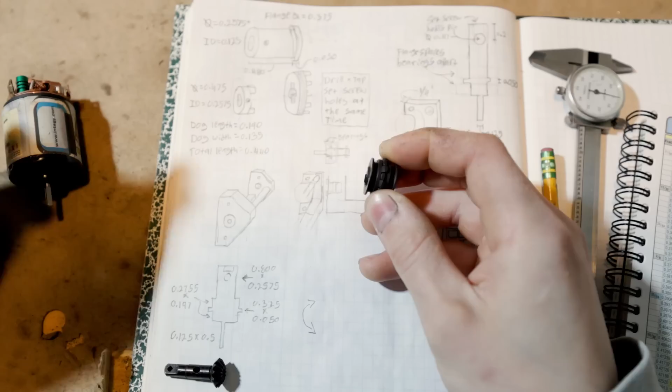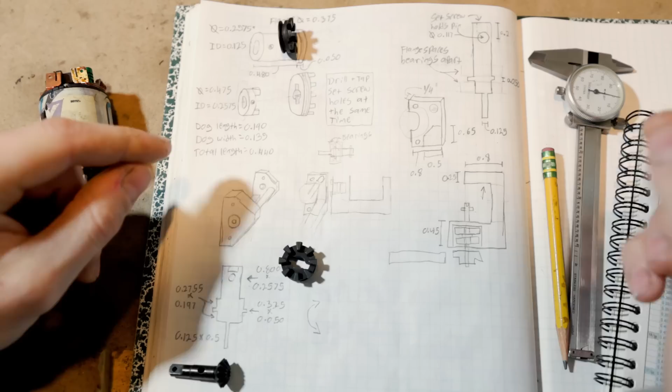So the first thing that needs to happen is one of these needs to get turned into a pinion for a motor. The way we're going to do that is by making a tube with a flange on it, and then the gear is going to slide onto that tube, stop at the flange, and then there's going to be a collar that then goes over top of that tube also, with two dogs that then align with the two slots here in the gear. I'm calling it a gear, it's not really a gear, you know what I mean.

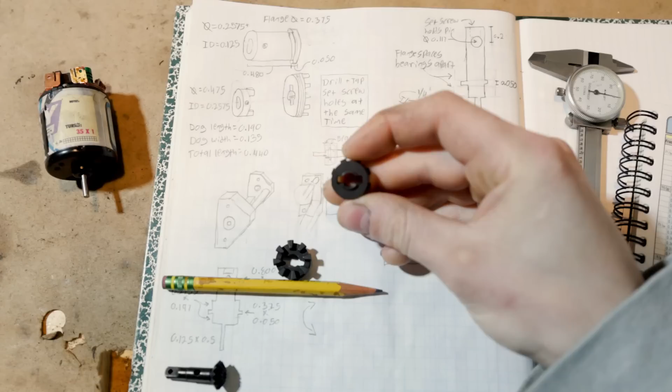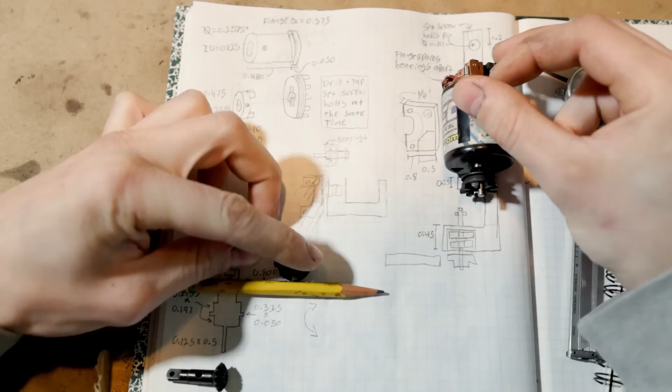That all is going to get held together with a set screw that is also going to hold that whole assembly onto a motor. Now that motor is then going to sit over here on top of this whole contraption, wherein there is a second one of these gears to engage and disengage with it on a shaft that sits through this big U-shaped block, essentially.

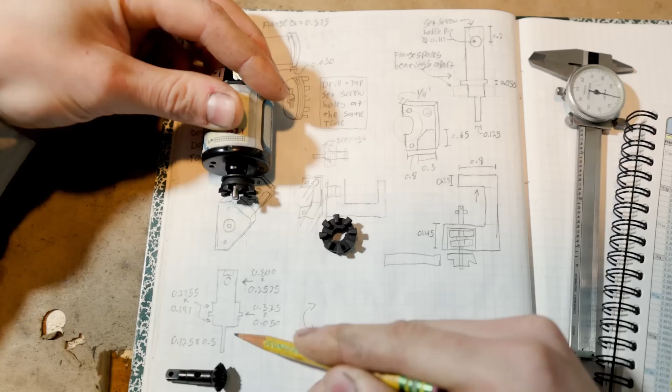So there's this big U-shaped block, there's going to be a shaft here with a couple bearings. This is a good representation of that shaft, so you've got one bearing that's going to sit right here, one bearing that's going to sit right there. Your motor pinion, or the outdrive pinion, is going to sit on this shaft. This pinhole is essentially the pinhole in this shaft.

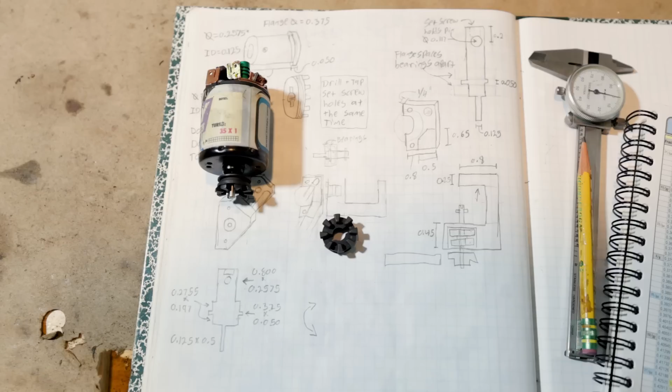Now if I could find the pin that I dropped, I would show you, but you guys are going to have to imagine it because I don't know where that went. So imagine there's a pin in that hole. That pin aligns with the slot in the gear, and thus the gear is able to slide over top of that pin while staying locked to the shaft. Does that make sense? I'm hoping that makes sense.

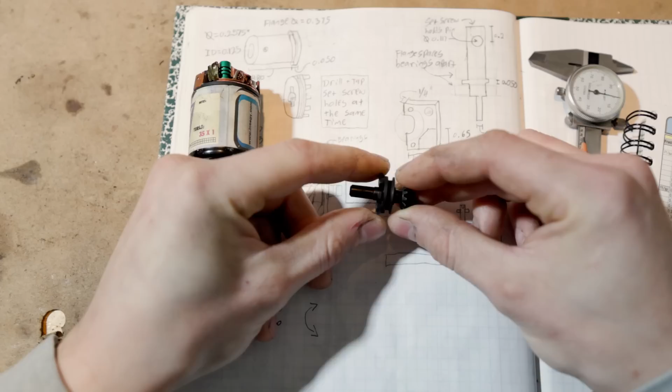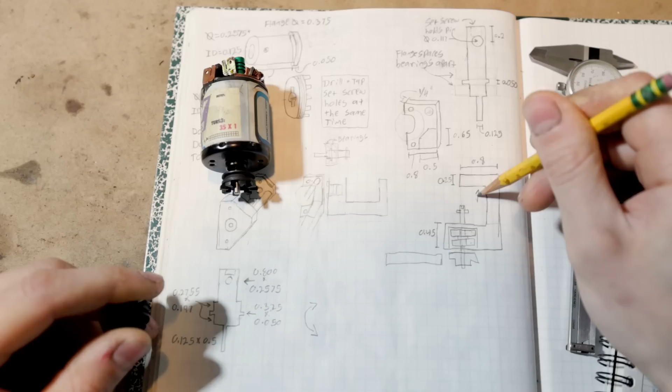So then that is what sits right here in this drawing and gets slid back and forth with some sort of fork that is going to ride on a shaft here. This diagram is looking at this big block of aluminum from this angle forward here. So there's going to be a fork that rides on a shaft right here that is going to fit into the groove right here on these gears and slide the one back and forth on the shaft over the pin like we were saying. This is just a cross section of the aluminum.

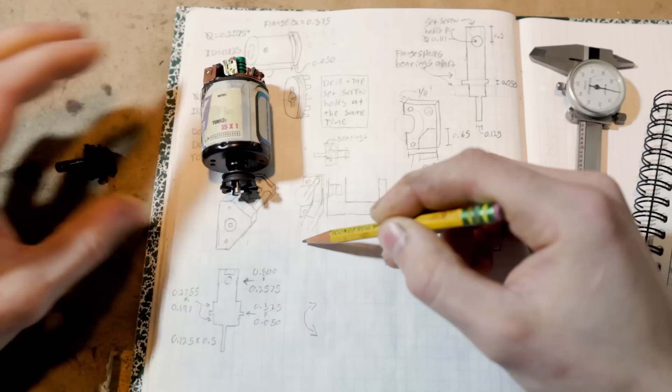It's going to be one big U-shaped block. It's going to look kind of something like this if you can imagine it. It's going to be kind of like a U shape on this side, but then it's going to have a big sticky outy bit, and then there's going to be another big block on the opposite side. Basically like this. This is another concept drawing I did. It's basically going to look like this, but a little bit different. Does that all make sense?

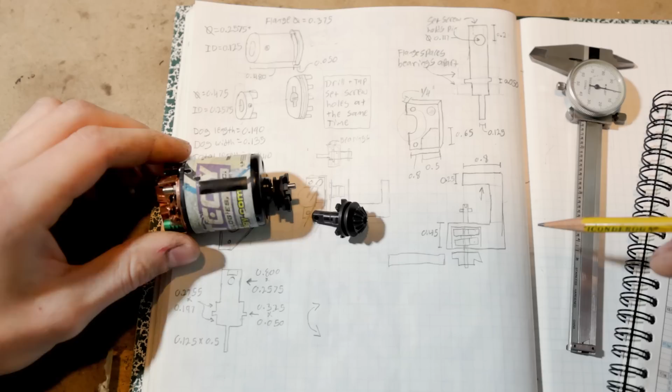I hope so. So anyway, all this is going to have to be done with the utmost precision because we're talking about tens of thousands of RPMs from our motor here. So I need to make sure that everything is spot on perfect in terms of dimensions. So the first thing I'm going to go make on Ramby, my turret lathe, is this flanged tube and this collar for turning one of these dogged gears into a pinion.

Quick progress update here, guys. I've got the flanged tube here fitting very nicely into our dogged gear. It's got a hole through it to accommodate the motor shaft. And then this part here is going to become the dogged collar that is going to slip over the back of it and engage with the two notches there that you see on the back of our dogged gear. So next for me is to cut said dogs on this piece and drill a hole through both parts to fasten it to the motor shaft.

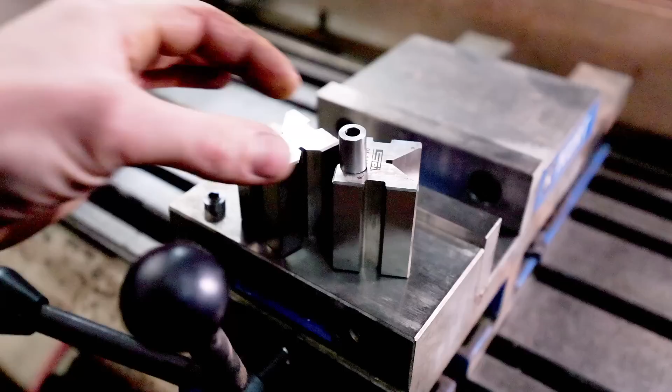So now, because I'm trying to machine such a tiny piece of metal that's round nonetheless, the problem becomes, how do I hold it? So the main way that it's going to be held, if I don't drop it, is going to be in these V-blocks here. So it's going to sit just like so. And that's all well and good, except when we go to clamp it. It starts to do that because it's so short and we need to take a fair amount off the top. So the way we combat this is by putting an offcut of the same diameter down at the bottom, like so. Now the bottom won't collapse in, and voila, just like that, we have a nice, firm clamping solution.

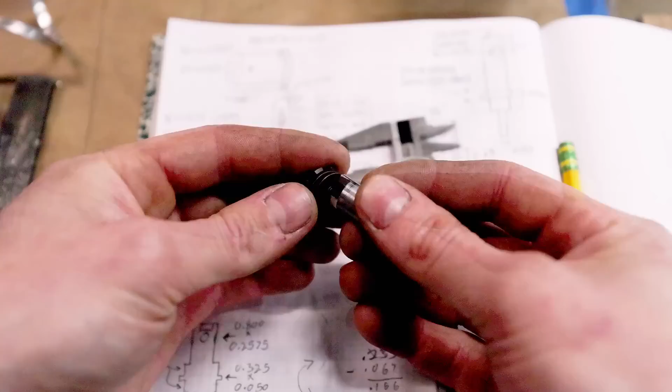Okay guys, it is test fit time. Here is the piece. Those are the two little dogs that we just machined. Let's see if it fits in our dogged gear here. Almost like a glove. Little love from the file, and everything is fitting together nice and tightly. It's even going to take a little tap to get it seated completely, which is perfect because I don't want this going anywhere when I'm drilling it.

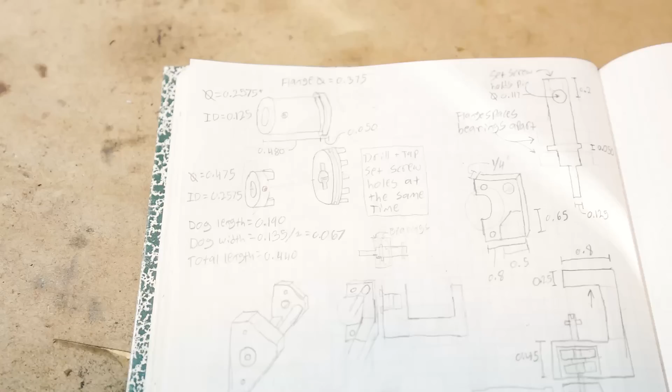Fast forward a little bit and we have our two first parts of our disconnect completed, and I've got them installed on a motor here. It's looking very nice. Everything fits together absolutely gorgeously, super tight fit, especially with the fit to the motor shaft. And speaking of, I want to give this a quick test to see if there's any excessive vibration. Alright, so we're just running on 6 volts here.

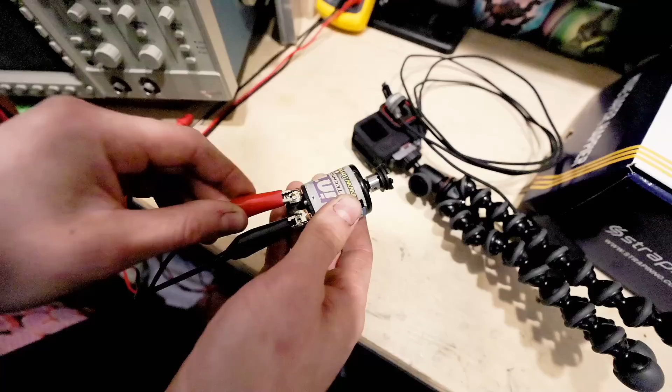Feels pretty darn good, actually. Feels pretty smooth. That's a really, really good sign. I can't see any wobbling or nonsense going on with this thing. I see a little bit of wobbling in the collar, but not of the actual dogged gear on the end there. And compared to it not on there, it feels just about the same, so that's awesome.

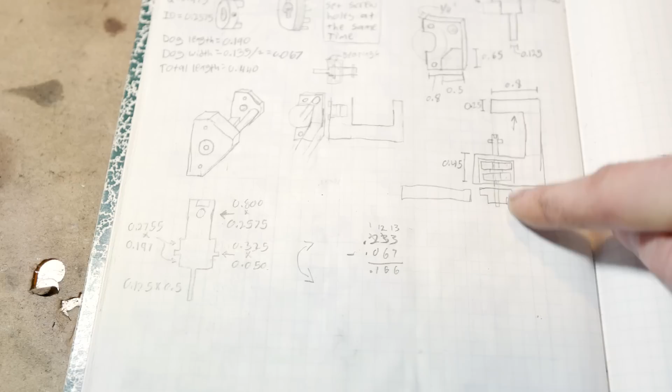The next part I need to make is this shaft here. It sits just here in our big aluminum block. It's got the pinion on one side, it's got our dogged gear on the other, has some bearings in the middle to support it. It's going to be a fairly difficult turning process because I don't want to remove this from the lathe once so that all my shoulders are perfectly concentric to each other.

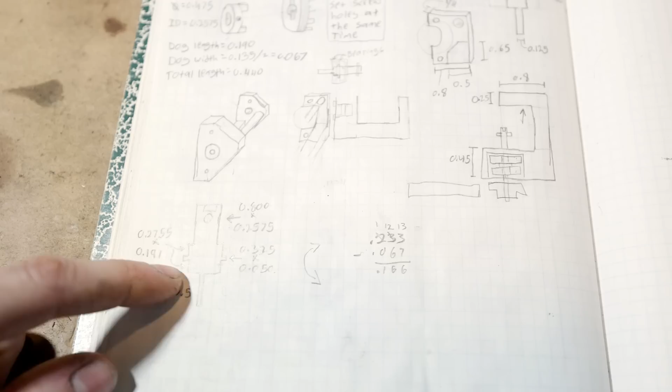So what I'll have to do is machine this out of a parent bar and then cut it out of that parent bar and check my measurements. So basically I'm not going to be able to do any test fitting of the bearings. I'm going to have to go entirely by measurement. That's going to be difficult, but let's see if we can do it.

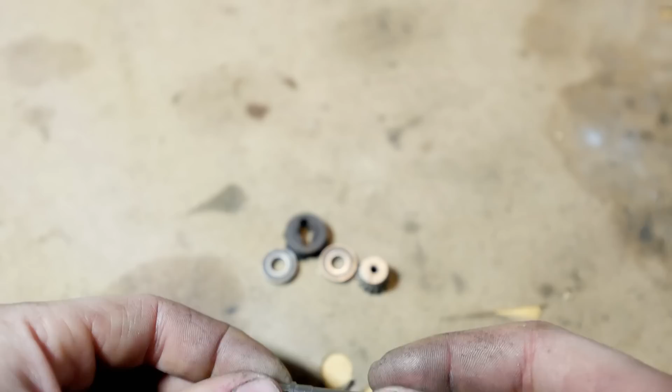Righty-ho, here is the shaft that I have made. It did not come off the lathe this nice looking. I took some Scotch-Brite to it and polished it up a little bit. Still need to learn a bit more about feeds and speeds on the lathe and how to get nice surface finishes. But I've got some bearings, I've got a pinion, I've got our dogged gear. Let's see how all of this stuff fits.

So pinion first. Does not fit. But that's a good thing. That means it's too big. We can always make things smaller. Next up is a bearing. Okay, this is nervous. This can either go great or horribly. That is also too tight. But again, that's not a bad thing necessarily.

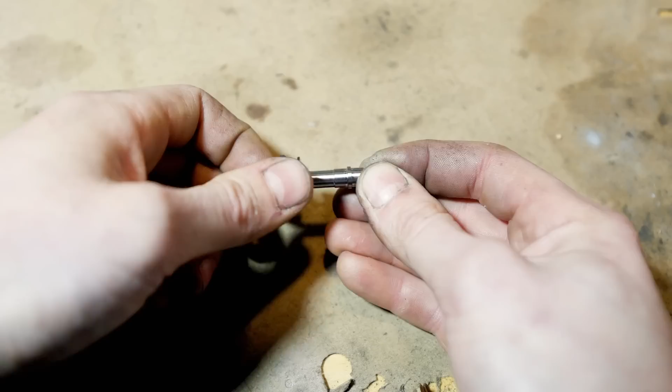Alright, so we got 1 out of 4, guys. That was kind of underwhelming. Our dogged gear fits on the shaft very nicely. It doesn't slide super smooth, but that's because the shaft is a little bit rough, so a little more polishing up and that should take care of it.

A little love with the file has our bearings sliding on super nicely. They are very tight in there, which is awesome. I've also got a flat now on the shaft for the pinion, which also fits very nicely now too. It's a tiny bit loose for my liking, but it's pretty good. I'm really happy with it.

And of course, this side for our dogged gear. You'll notice I haven't drilled the hole in the shaft just yet, and I'm going to wait to do that until probably close to the very end, because I'm not quite sure where our dogged gear is really going to end up on this shaft. I also left it long just for extra wiggle room. So with that, I need to go do some measuring and draw up some plans.

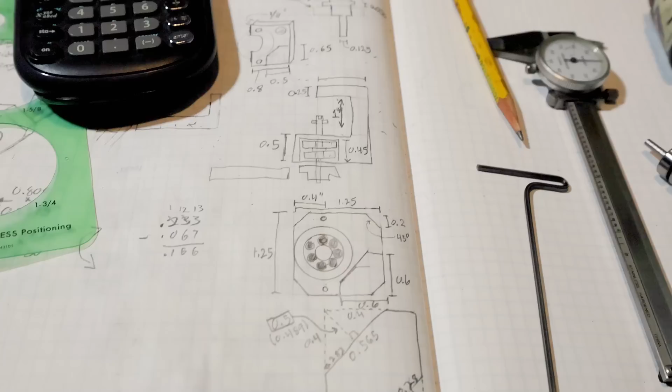And a little while later, I've got a pretty good idea of how this big aluminum block is going to work. I've got some good drawings, some good dimensions that I'm confident with. So with that, it's time for me to go out and start squaring up some stock.

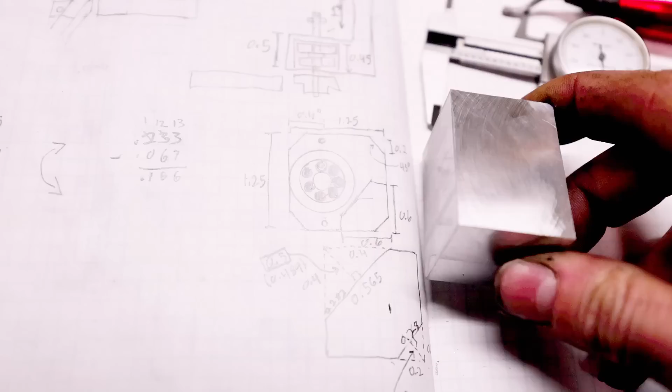I've got my stock all squared up nicely. As you can see, I already had a piece that was squared in this dimension perfectly, so I only had to machine 2 sides, which was nice. Next up, I'm going to machine these chamfers on the edges, which are these edges here, there, and corresponding on the other side.

Righty-ho, I've got my aluminum block nice and octagonalized, very nice and pretty there. Next up, I need to do some practice bores for our bearings, and to do that, I'm going to be using the canned cycles that are in the milling machine. Now, what are canned cycles? I'm saying canned as in like canned spinach. Canned cycles are essentially pre-programmed programs, or pre-written programs that you just input a couple variables and it writes the program for you so that you don't have to do all the work.

So I need to do a couple tests, not only to get our bore diameter correct, but also for me to just remember how to use the stupid things, because it's been a while and I don't want to crash anything.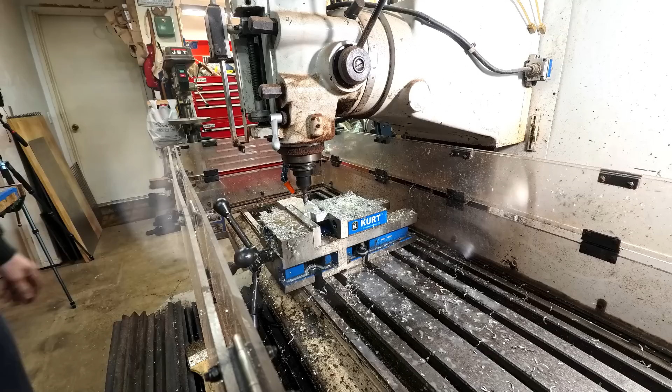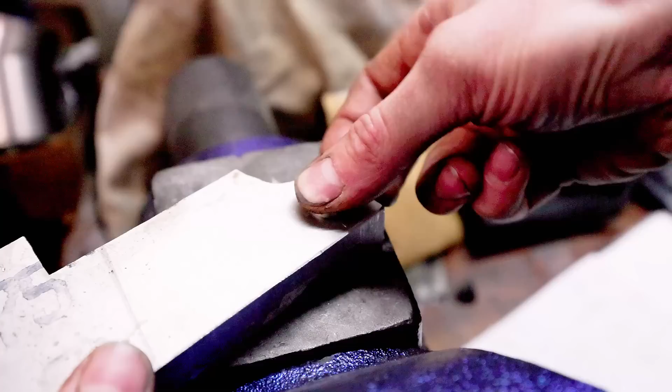Guys, we got ourselves a fit. Check this out. Oh yeah, simply gorgeous, darling. Man, that is just absolutely beautiful. Such a perfect fit. So with that, let's move on and put one of those holes in our octagonal block.

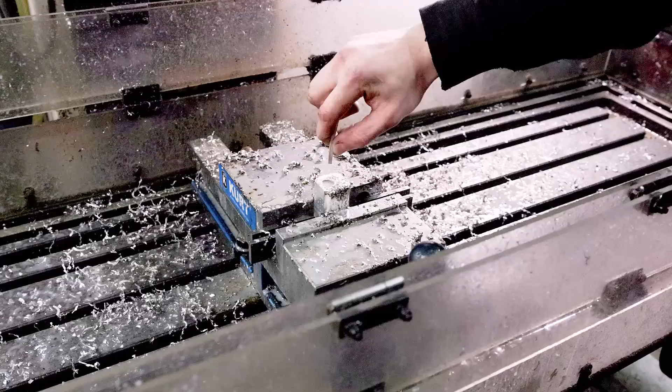Oh, I fucked that up. Wait, did I? Hang on, I don't know if I fucked this up or not. I have no idea, guys. Let me see. I cannot see in that hole, but something tells me that is too deep. Oh, no, actually, I think we got it. Holy crap, that is awesome sauce. Yep, we're good, guys. I don't want to push that in there because I can't get it out, but that is a freaking fit. Oh, yeah.

Woohoo! Next, what I need to do is drill a hole smaller than that all the way through the block. What we're doing right now is creating a shoulder for our bearings to sit on so they don't fall all the way through the hole, essentially. It'll make more sense once the whole thing is done and you can really see and understand what's going on. But we're making a shoulder by drilling all the way through, and creating clearance for the motor. The motor's got a little bump out by the shaft. It's to accommodate that as well.

And while I'm here, I'm also going to drill 2 mounting holes for this thing, because this is essentially the extended side of the motor. So this surface is what's going to get bolted to our motor plate. And I want to make sure that those holes line up with a standard motor configuration so that I can take this silly contraption out if I want to and bolt in a normal stock motor.

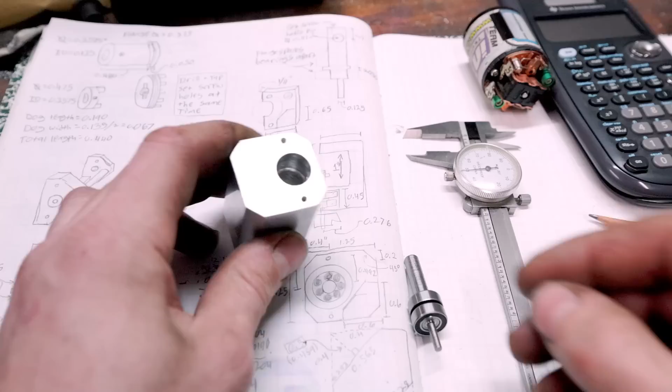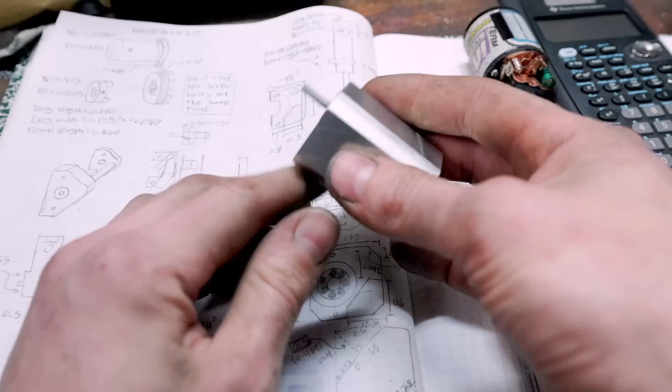Here's where I'm at. I've got the 2 bolt holes drilled and tapped there. You can see there's a shoulder partway down that hole. Our bearing assembly fits in there gorgeously. Needs just a little tap to get it seated down in there. It's a little bit proud, but I'll deal with that later. I don't know if it's going to be an issue or not. Hopefully not, but we'll have to wait and see.

As you can see, my part is starting to look a whole lot like this drawing here. My next step is to hog out a bunch of material out of the middle to make room for my dog gears and my engagement fork.

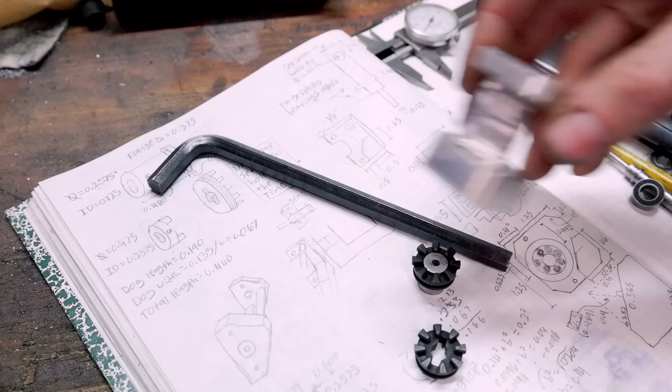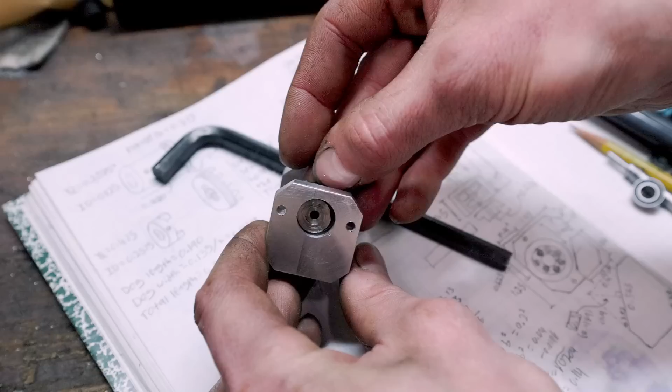Alright, status update, yo. This thing is looking like some serious awesome sauce. So what I've done up until this point is obviously I cleared out a huge amount of material from the middle. I drilled a couple motor mount holes there because our motor is going to mount on that side, right? And then I also drilled out this hole bigger to allow for some clearance for our pinion so that I can actually recess the base of the pinion into the block like so.

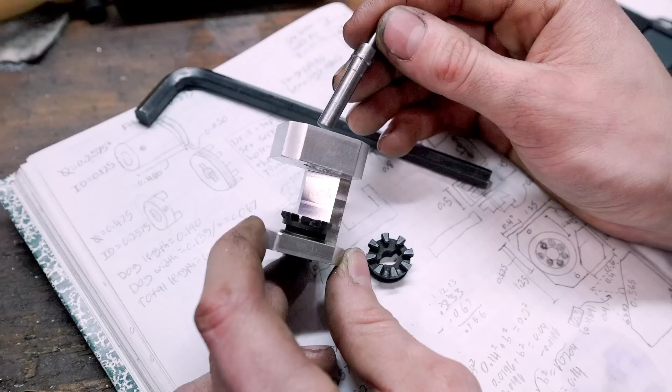Now that our big aluminum block is mostly done, I might still need to make some adjustments later, but I need to start thinking about how long this shaft really needs to be and cut it down as well as drill the hole for it. And I'm actually going to chuck this back in the lathe and shorten up this little shoulder a little bit because as you can see the bearings sit just proud on the block there. I can tap it in a little bit farther, but really I just need to take off maybe 30 thousandths of that shoulder, not much.

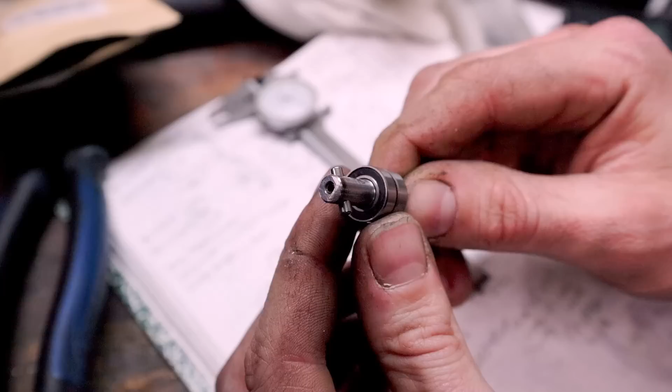All right, a ton of progress has been made. We have a shaft with a pin through it, with a set screw in the end holding it in. Our dogged gear slides on top of that absolutely gorgeously. Look at that. That is absolute awesome sauce right there. And on top of all this, I've got my motor bolted up to our big aluminum block. Our shaft slides in absolutely gorgeously. Gotta kind of put this all together at once here. Put our dogged gear in there, push that in, and voila, look at that. This is so freaking cool.

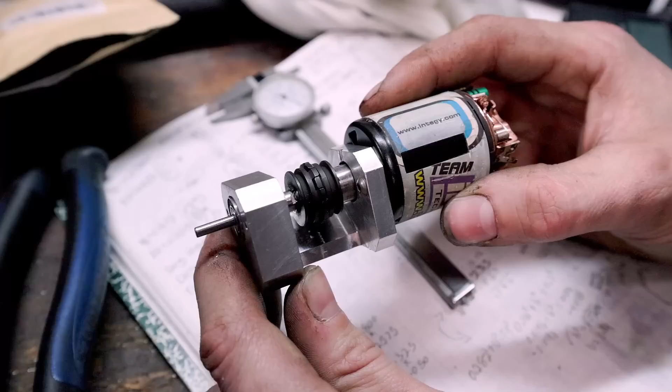The next thing I need to think about is how I'm gonna get a shift fork or an engagement fork in here to slide this guy back and forth to engage and disengage the motor. There's going to be a shaft that runs between these 2 pieces that's going to be real nice and smooth. That'll hopefully act as a guide to guide it. But I'll have to do some thinking about that. But hey, that's tomorrow's problem. But this is super freaking cool. Check that out. Oh my gosh, I can't get over it, guys.

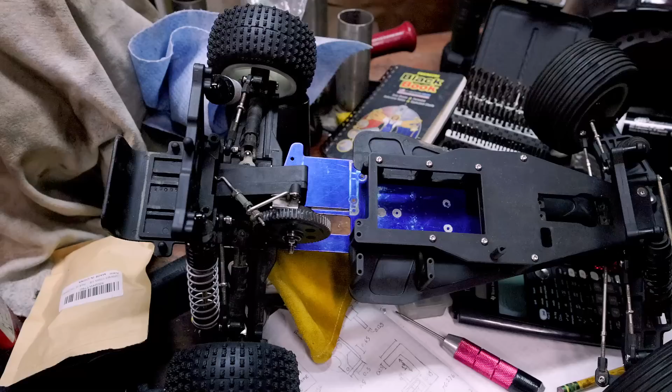It's just so awesome. So we haven't even taken a look at the Rustler yet this episode. And for those that are still kind of confused on how this is all going to work, this guy is going to sit in here. There's going to be a pinion on this shaft, and this face is going to bolt up to a motor plate that sits just behind the spur gear here. And then we should have a good amount of adjustability with the motor this far away from the gearbox to actually get a decent sized pinion on there without running into any clearance issues.

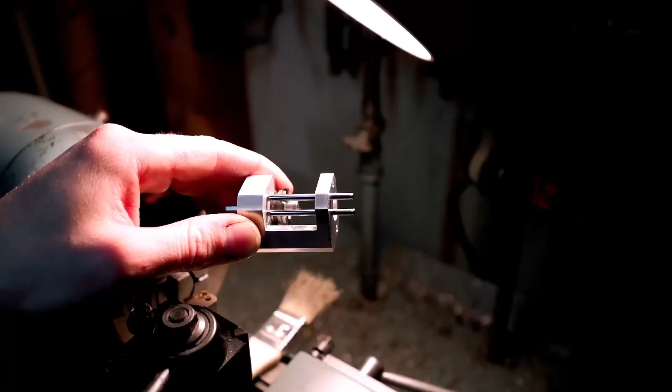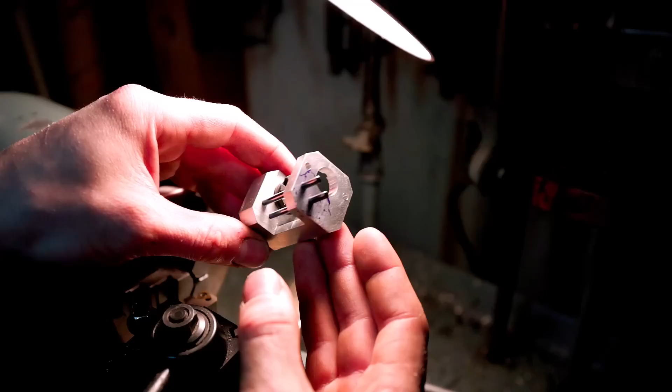Alright folks, so I decided to go with a dual rail system to hold my engagement fork. Reason being is I want that fork supported and not in contact at all with my dogged gear except for the side surfaces. Right, so say this is my gear and this is my engagement fork. I don't want it resting on top of the dogged gear, right? Because I don't need that extra friction. I only want it contacting the side surfaces to move it back and forth.

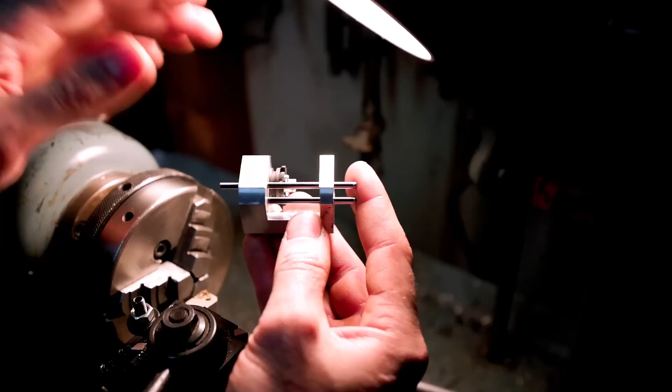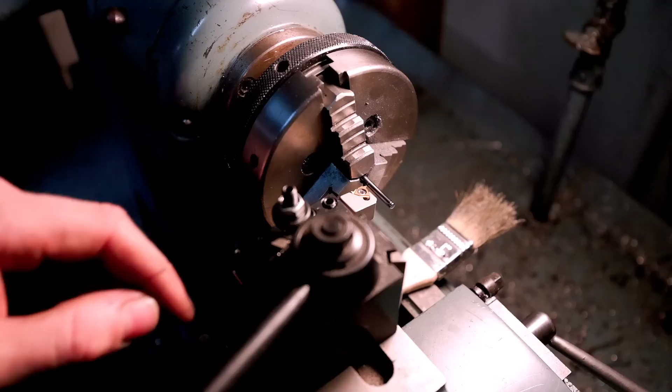I'm over here at Ramby because I'm about to cut a couple grooves in these rails for some E-clips just here on the inside of this part of the aluminum block that will keep the rails from sliding out. To cut the E-clip grooves, I'm going to be using this threading cutter. Reason being is it's got the smallest point that I have of all my tooling to cut that groove because it needs to be really, really narrow.

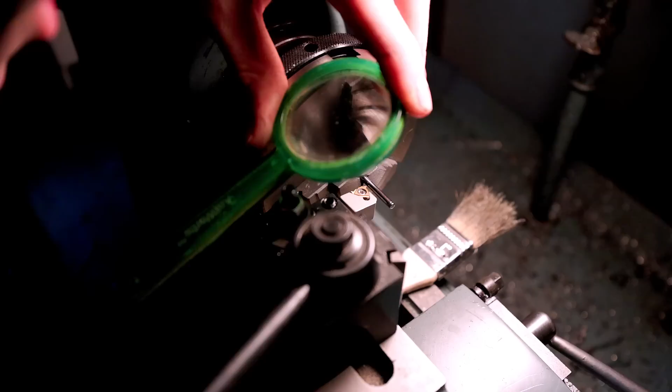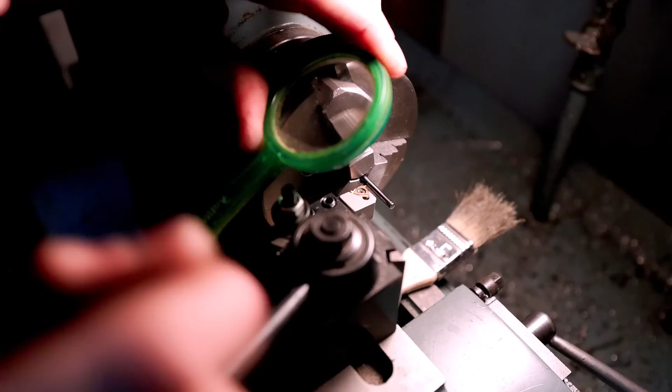And to line this up, I don't know if you can see, there's a mark on the shaft there next to the cutter. I think you can see it. I'm literally having to use a magnifying glass, this shitty plastic magnifying glass, to line the tip of my cutter up with that mark, because that mark is exactly where the E-clip needs to be, or at least where the outer edge of the groove needs to be. Let's give it a whirl. I've already set my depth to the inside of this groove here on the end of the shaft, so hopefully if I just go into 0, it should be good. Let's give it a whirl.

There's our little groove. Let me go grab an E-clip and see if it will fit on there. It doesn't quite snap on like I'd like it. I think it needs to be a little bit deeper or maybe a little bit wider. I'm gonna try making it a little bit wider instead of deeper, and we'll see how that goes.

No, not on the floor. Oh, where did you go? Oh, it's dark down here. I can't see anything, guys. This is bad. This is bad. I don't know where my E-clip went. No! Look at me go, dropping shit on the floor. I have no idea where that went. I'm gonna go grab another one. Let's see if second time's a charm here.

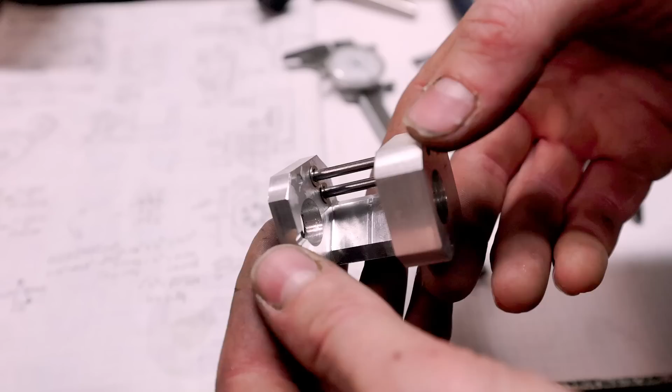Oh, that is gorgeous. Oh, that is absolutely perfect, guys. Yes. Heck yeah. All right. I'm going to do the other shaft, and then that should be good to go for the rails. Boy, never did I think I would actually be using E-clips in a build, guys. That is something else. This thing is looking super trick. I went ahead and cut off the excess rail, and now I've got to brainstorm how to make the engagement for it. That's going to be a tricky one.

There you go, guys. There is my shift fork. It's looking awesome. It's only about 75% of the way done. Reason being is I want to leave some extra material here for when we hook up the servo, which is going to be next episode. So I don't want to cut myself short anywhere. So I'm going to leave it as is for right now.

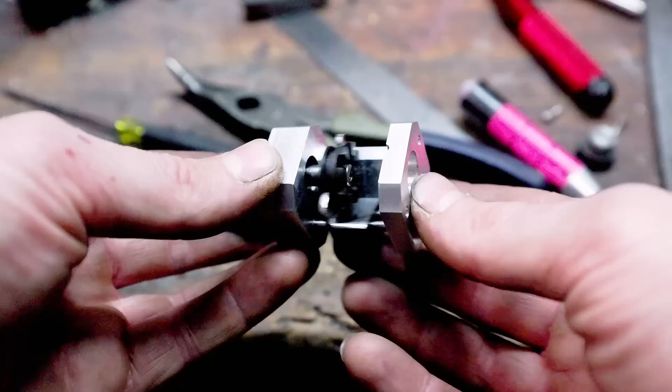Check that out, guys. That is freaking incredible. It is so smooth. I had to oversize these holes just a little bit. Not too much though, and it slides super nice and smooth. Spins perfectly, no binding whatsoever. Definitely by far the most complicated little device that I have ever built, but it is incredible. Now we can't finish this episode out without actually putting some power to this and trying this with the motor running. So I will meet you guys in my room.

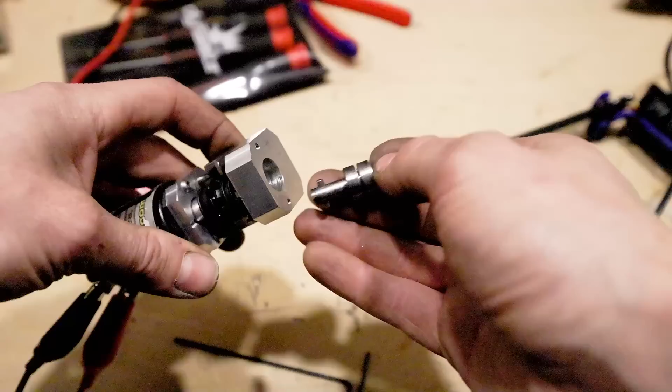Check that out, guys. That is so cool. Really all it needs to do is disengage under power, which, when disengaged, perfect. That is so cool. I can't believe that this more or less works, guys. That is unbelievable. I guess this is a good time to bring up, how are these bearings going to stay in the block, right? Well, my plan, I think, is just to have the motor plate be what holds them in. I think that's just going to be the best scenario instead of trying to do a screw or some sort of cover plate.

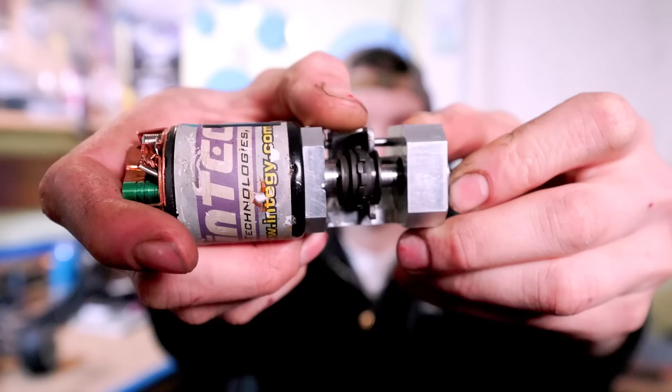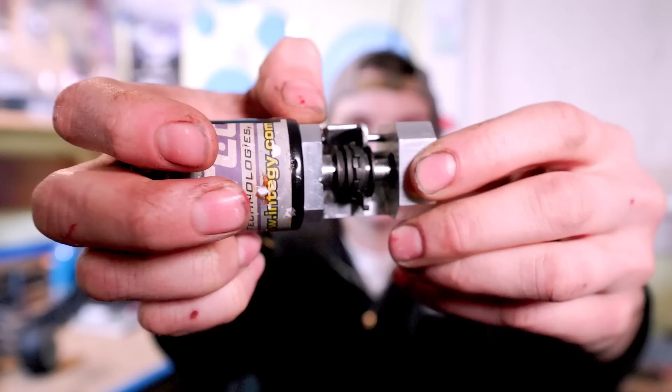With that, folks, the craziest contraption I have ever made, the most precise, ridiculous, outrageous contraption I've ever made is finally complete. It's been over a year in my mind and it's finally come to fruition. This is just so incredible to see. I know this has been a very tech-heavy episode and probably kind of long too, but next time we will get on to actually working on the Rustler, making some battery mounts, making a motor mount, servo mounts, all that good stuff is going to be next time in episode 3. So make sure you tune in for that.